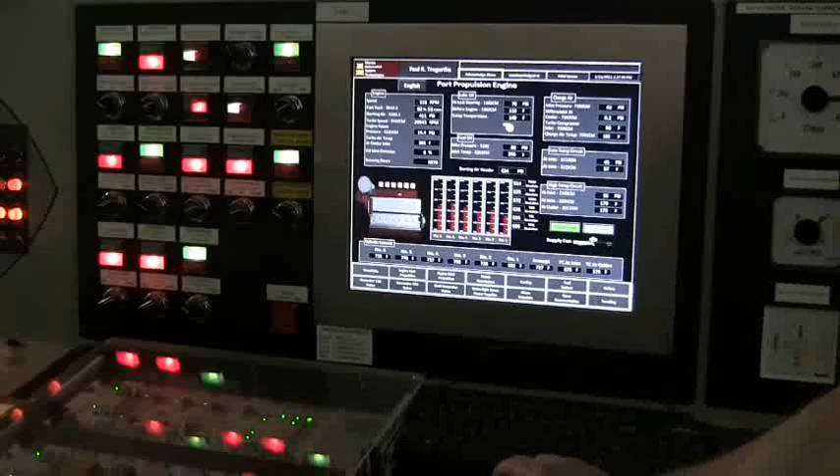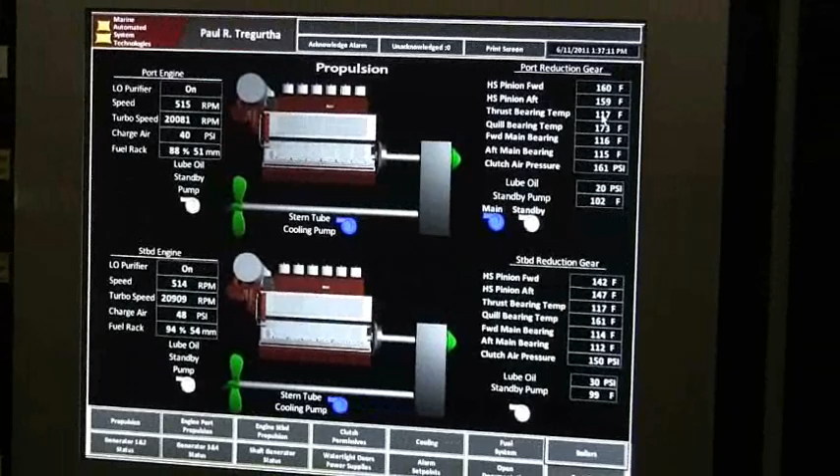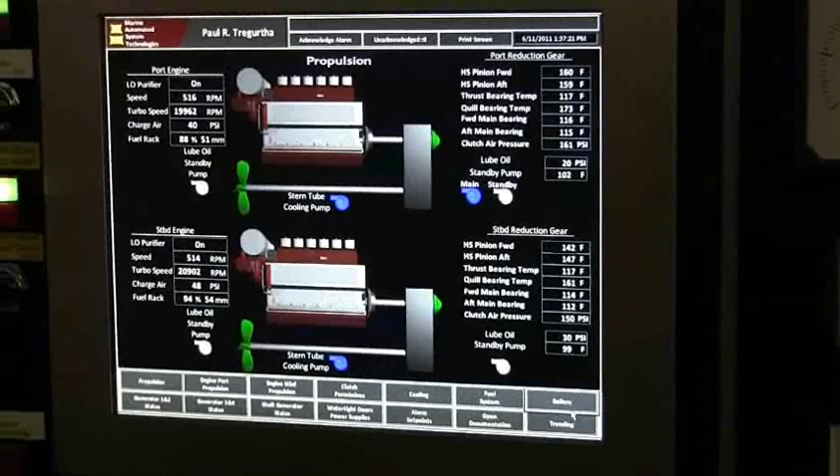This is the combined propulsion display. Each screen gives you a little bit more information. Oh, these are like a V-drive. They're not a direct shaft going out the back from the bell housing and the motor. They go into a gearbox, I'll show you that when we go down there. So essentially it's kind of a V-drive, kind of, right? It's not a V, but it's in backwards.

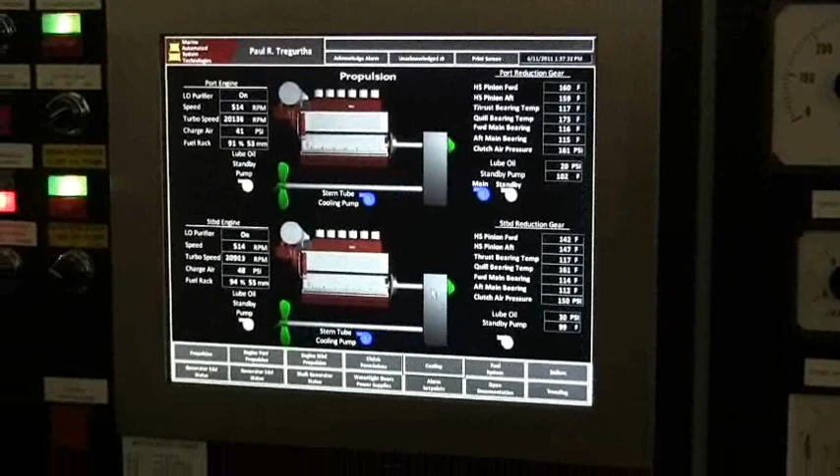Is it a reduction gear in that transmission? That gray box to the right is actually the reduction gear. At what ratio? That's about 4.3 to 1. We're turning 514 on the engine and 119 on the shaft.

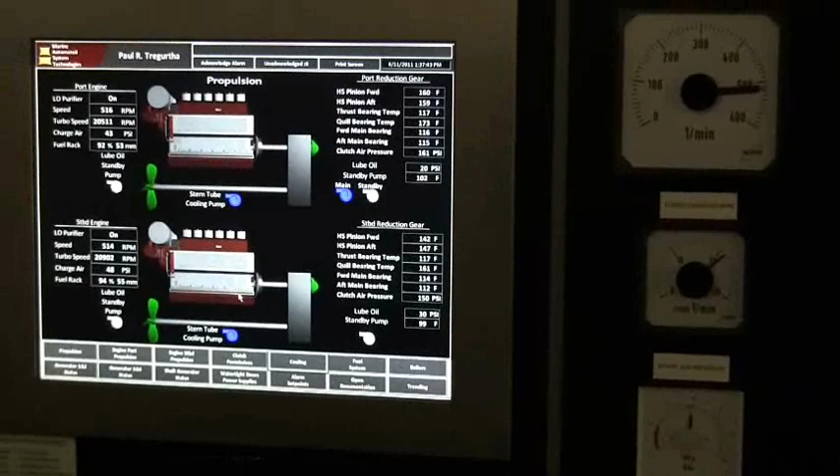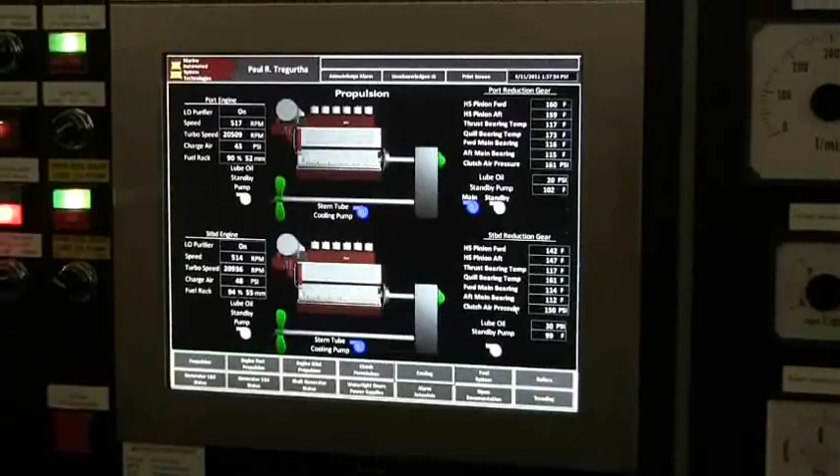This is the reduction gear, your clutch housing hangs on there also, the air clutch. You see all your varying temperatures on your reduction gear. You've got your little purifier and stuff. The turbo is going 20,000, 21,000 RPM right now.

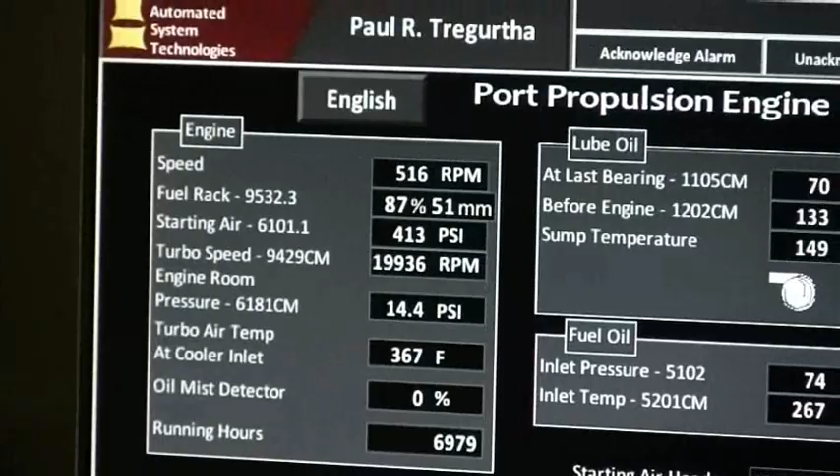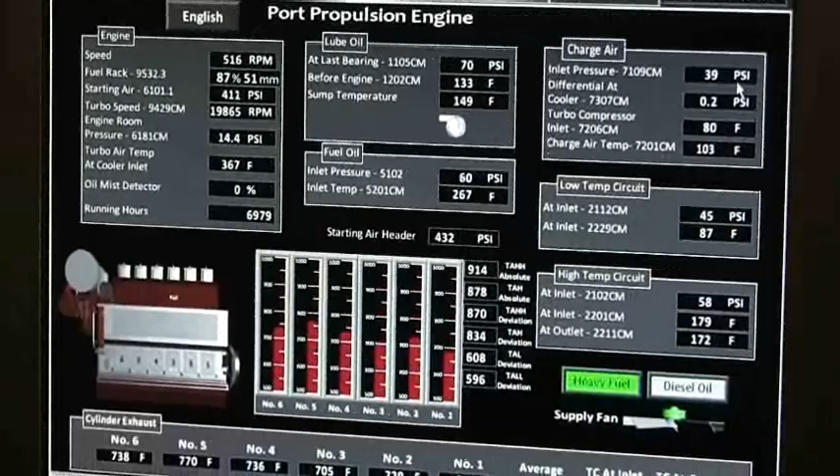Let's get back up to that one. We're only down to 39 pounds of boost, but if you're going flat out, we've seen it up to 52 pounds boost. That's unbelievable. Yeah, that's nuts.

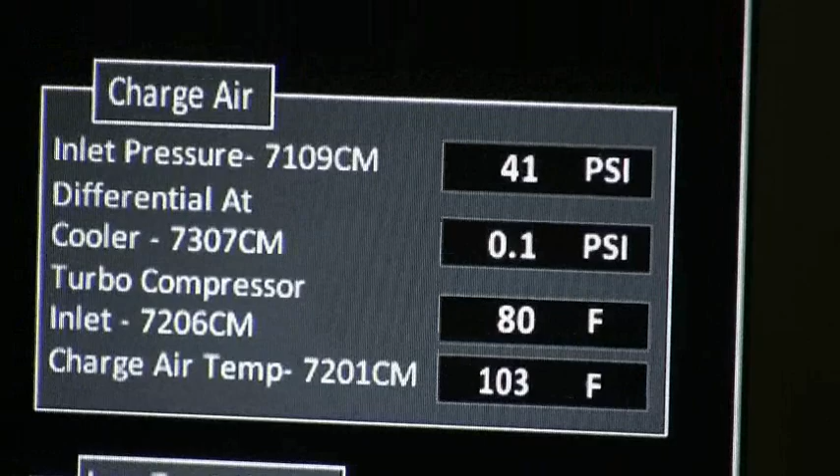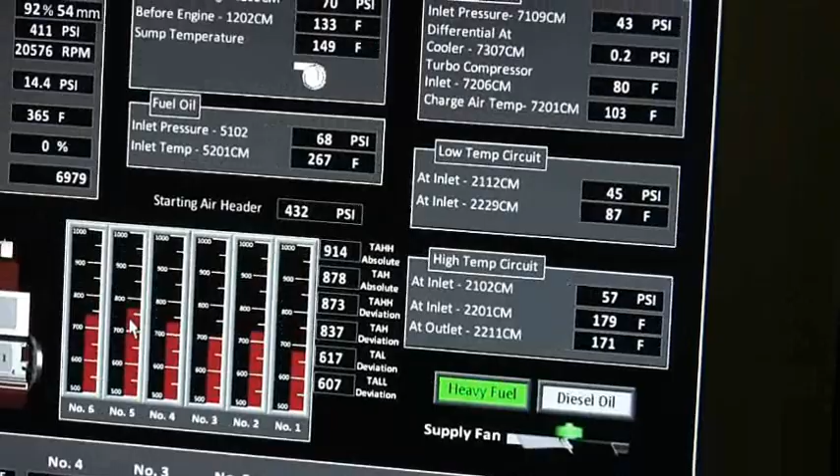Your exhaust temperature — the hottest one is running about 830, 850 right now on number 2 and number 5. Number 5 is at 769.

It's like our clutch permissives. We have to have all green lights in order to start them up and get ready to clutch in. We have to have all our permissives met before you can clutch in.

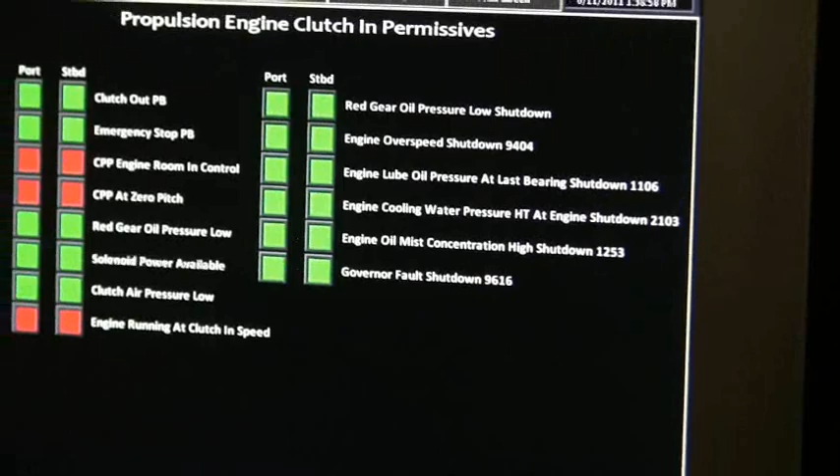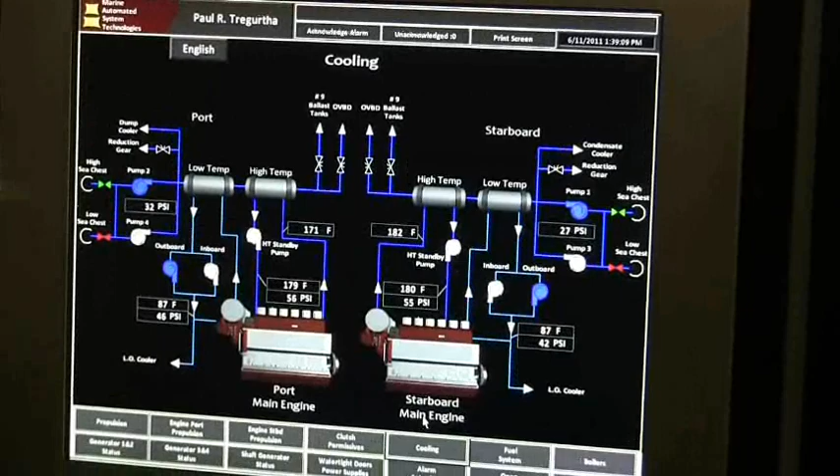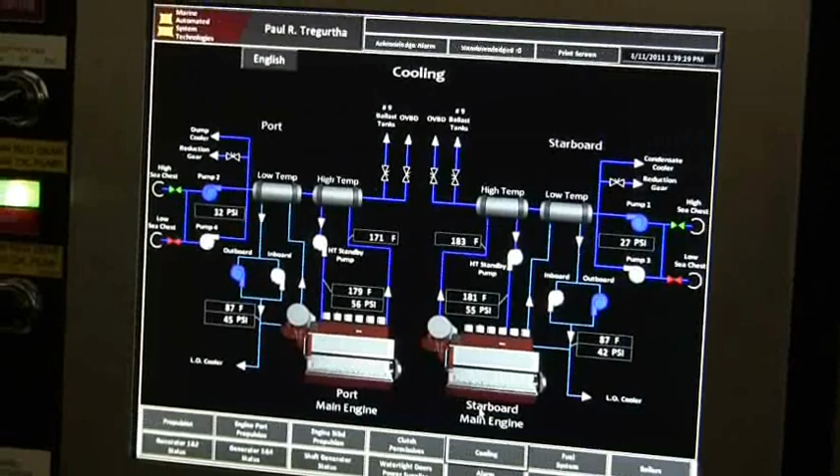Yesterday when we docked in Midwest, did you shut both engines down that whole time? Yeah. I didn't even hear it start. We opened the test cocks on there, Dan will show you them when you go down there. Then you get ready to start up, you pre-lube them, blow them over. You got a pre-oiling system on them? Yeah.

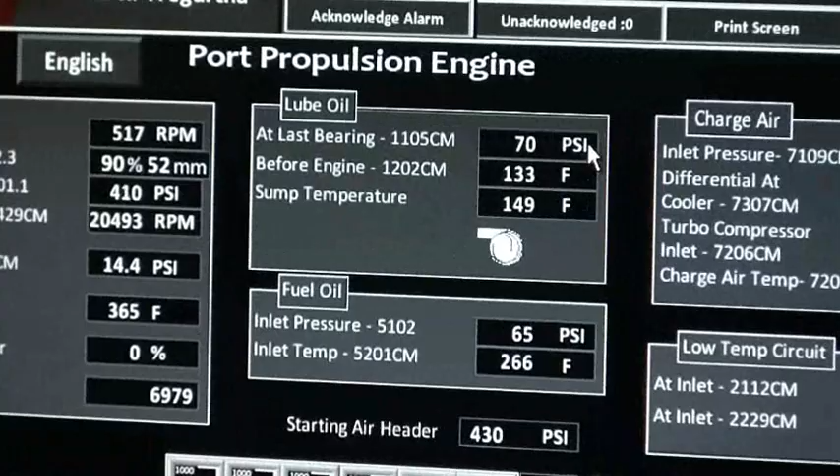That just circulates through the whole internal gallery system of the engine before you start it, so it's not dry. Here you can see what your lube oil pressure is at your last bearing, and some temperature. Well, that tells everything. My lord, yeah.

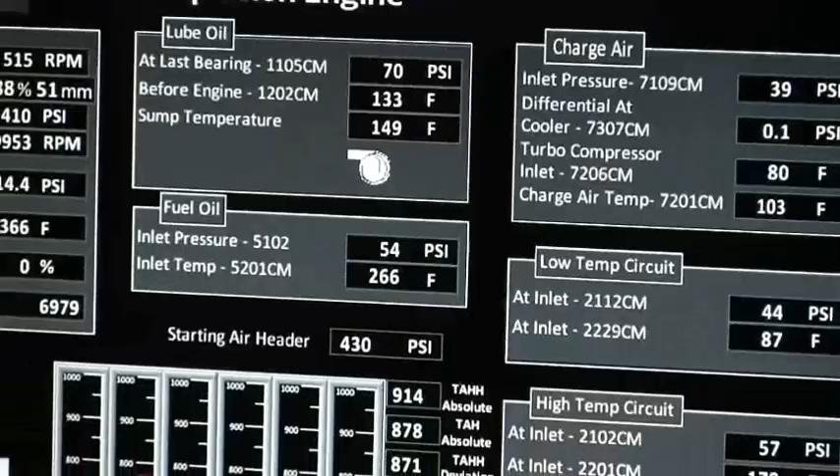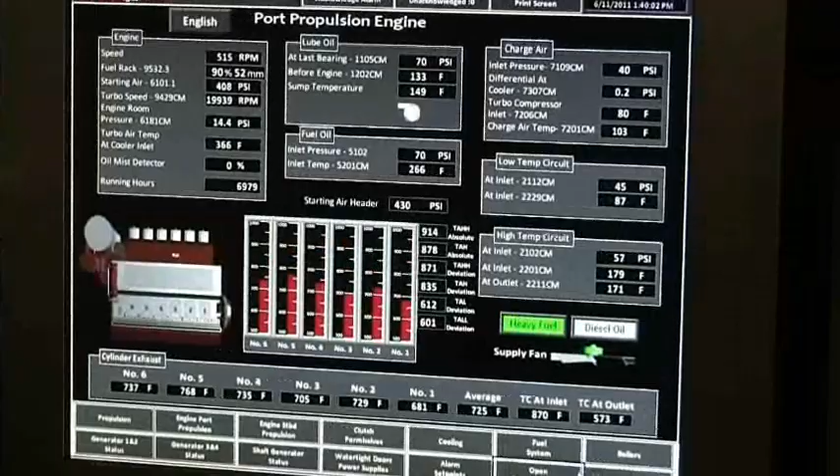Like on your cooling, you've got all your... What about the pyrometer? What about exhaust temperature, the gas temperature? Well, that's right on your port. Would be up over 1,000 degrees? Right here. And here's your turbo inlet, turbo outlet.

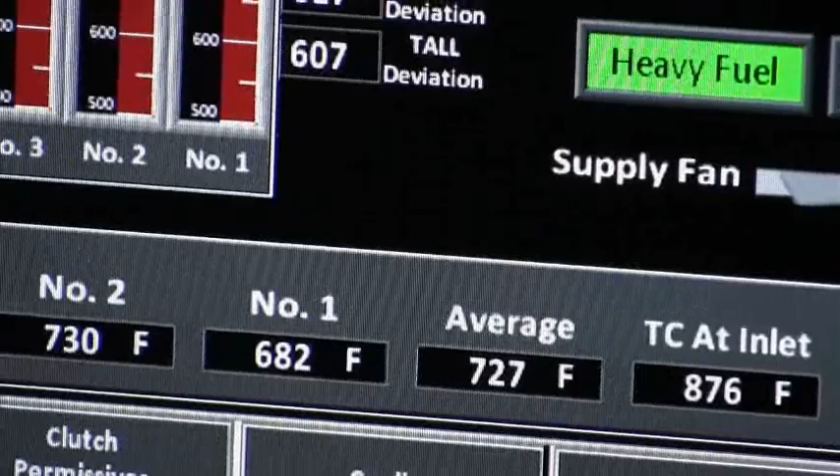Does it show temperature at the stack, or no? Yeah, that would be at your inlet here. 872. Yeah, that's your each individual cylinder exhaust temperature. Wow.

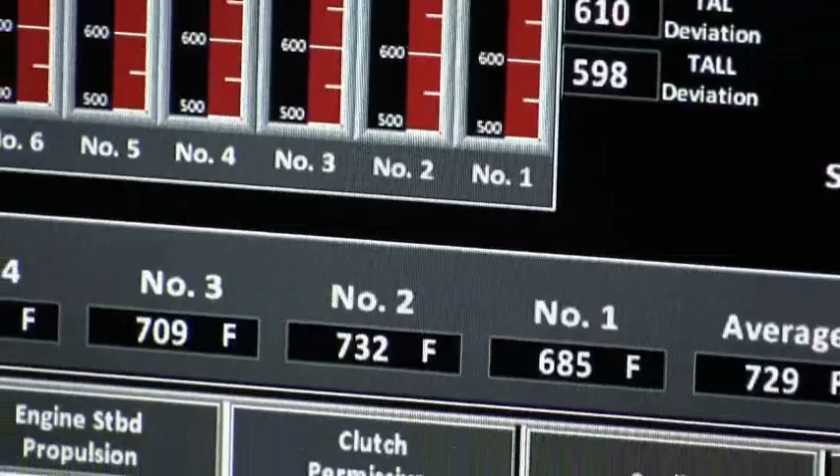Why would one run so much cooler? Say for instance, number 5 versus number 1, almost 100 degrees difference. When they set these in the factory, everything's factory set. Everything is. We have our original

documentation, our test bed documentation, which was ABS approved, EPA approved, and everything else. You can't really take, like on the old engines, one fuel pump and throw it on another one or whatever. You've got a shim plate to get a certain firing pressure and exhaust temperature parameter that you have to stay within. So that's all set at the factory, you can't go swapping out. No, the shims are riveted to the block, we can't change the shims.

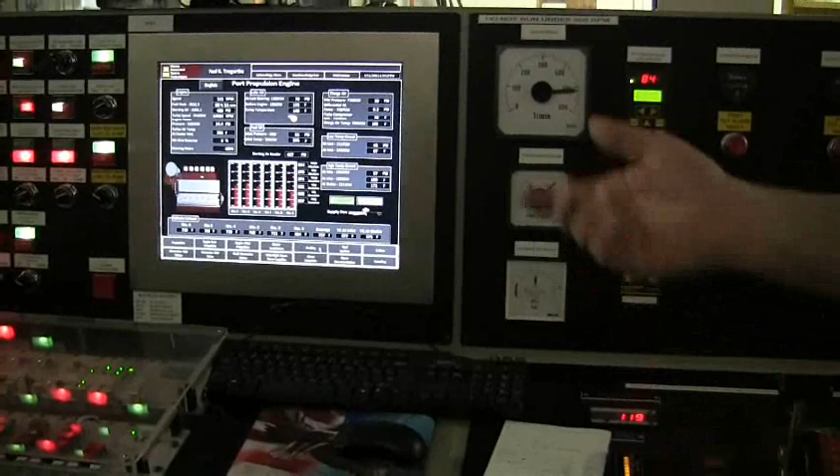See, on the old engines, if we had a problem with a pump or a pump gun, we swapped the whole pump out, no big deal. Here, everything is different. Everything is so EPA stringent. It's nuts, it really is.

Sounds like it. Okay, when we water wash our turbos and stuff, we have to log it. We have an EPA log in there, we have to write down the engine hours, the time, and everything.

Yeah, it's crazy. Are these engines American built or are they foreign? Germany. Germany, MAK.

Maschinenbau Kiel or something - MAK. Really? They've been around for a long time. I've heard of MTUs and MANs, and Deutz and Sulzers, but I've never heard of MAK in a while.

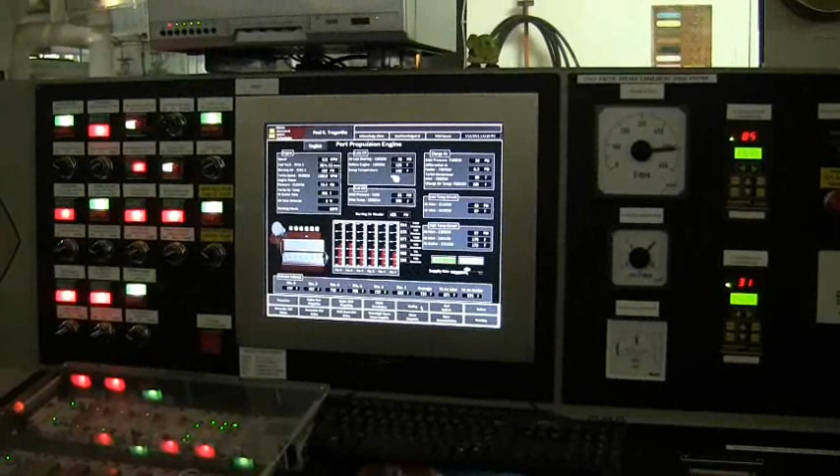MAK is good. In fact, I think they have like 50% of the market now. It's unbelievable. This is a division of Caterpillar - Cat bought out MAK. Cat also bought out EMDs.

Boy, Cat a few years ago wasn't doing too well. Well, you see what their stock has done in the last 3-4 years? Since 2008, it's tripled about. They went out of the heavy duty trucking business now - you can't get a Caterpillar in a Class C or Class D, Peterbilt, Kenworth, nothing. You got to buy their own engine now. Peterbilt and Kenworth make their own engine.

Now you got a urea tank on these new trucks with the Cummins. You got to put urea fluid in a tank, and it burns it, completes the burn before it gets to the exhaust or goes out the stack. Adds $10,000 to the price of the truck.

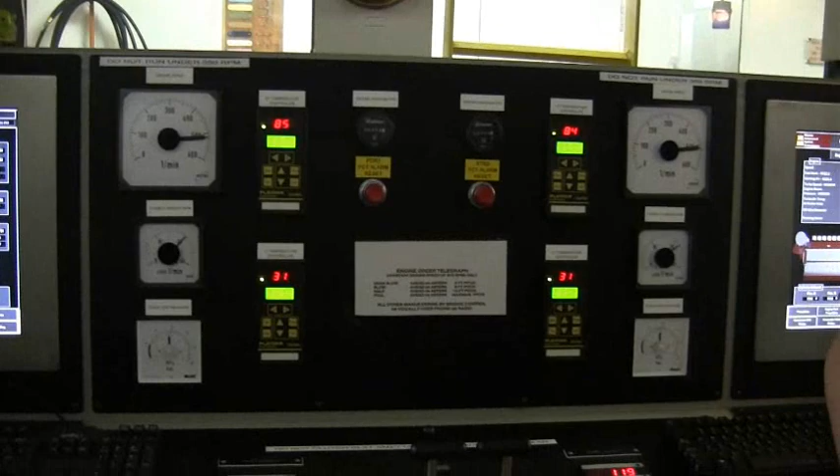Really? So how many hours can you put on an engine before it needs to be overhauled? Well, for any big work we're going to have to do, at 15,000 hours we'll be pulling pistons and checking everything out. 30,000 hours for the main bearings and stuff. So they're pretty beefy main bearings. But we'll be spot checking them at 15,000 hours - pull one head off at the end of the year, check that, and borescope all the other cylinders.

And what kind of fuel burn rate do they consume under power like this? How do you measure it - gallons an hour? Well, we go by pretty much every 24 hours, because everything is so up and down. Figure about 10,000 gallons of main engine fuel a day.

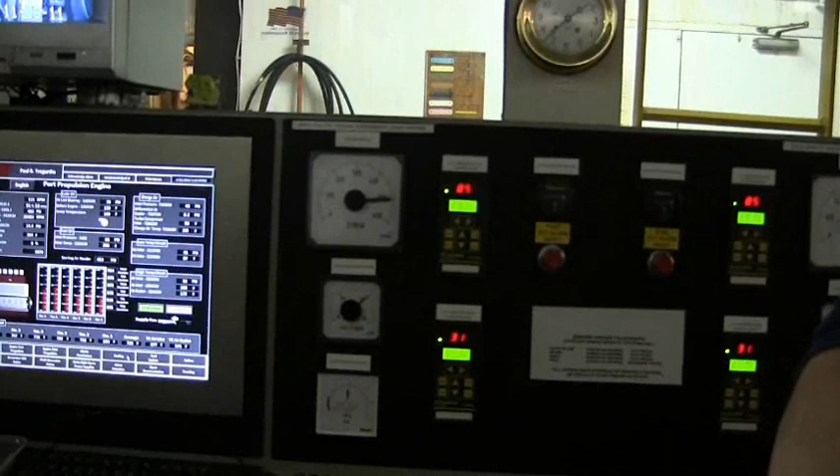But we're also burning that in our boilers when we're docked - we're burning heavy. On the run, our waste heat boilers are creating enough steam that our hotel boilers don't even kick on. That's taking care of the steam load for all our heaters - fuel heaters, purifier heaters, lube oil heaters - and whatever hotel steam or town steam we may need for heat.

But at the dock, you're running the boilers, and that's consuming some fuel too - close to 10,000 a day. In fact, we burn more sometimes. If you're in rough weather and bucking a headwind, you're burning a lot more fuel.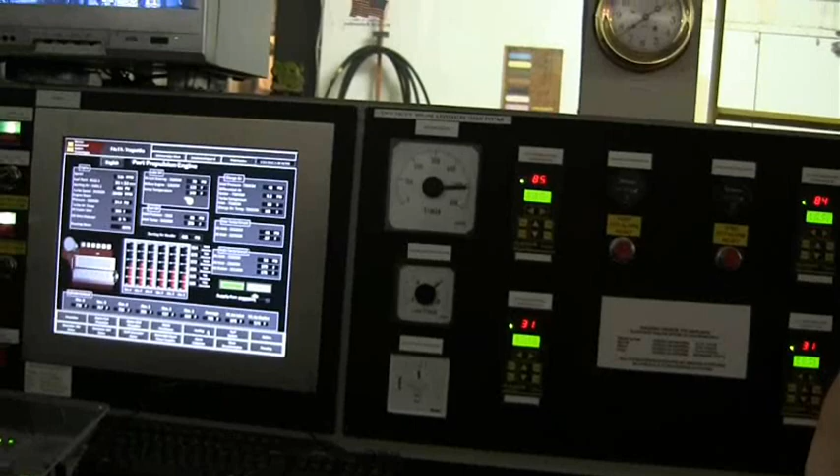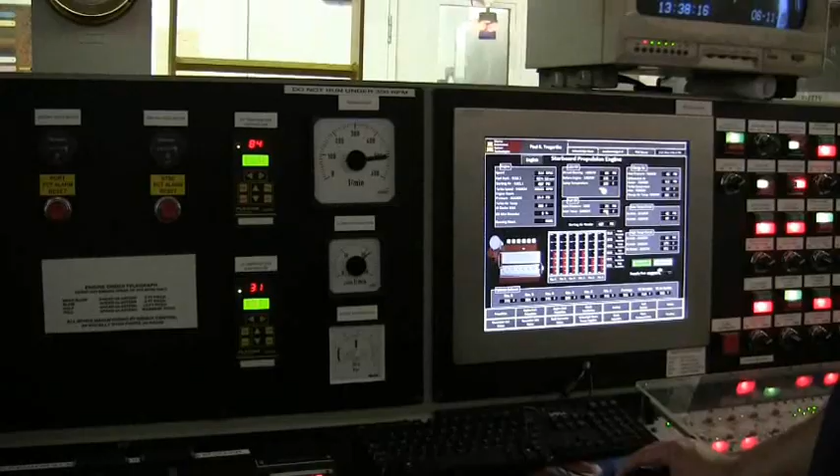You burn that fuel - do you preheat it in a tank, or in a small quantity just before it goes into the motor? Dan will bring you through the fuel module. What did you say, 280 degrees? Well, it's 266 degrees right now - it's set for whatever viscosity you need.

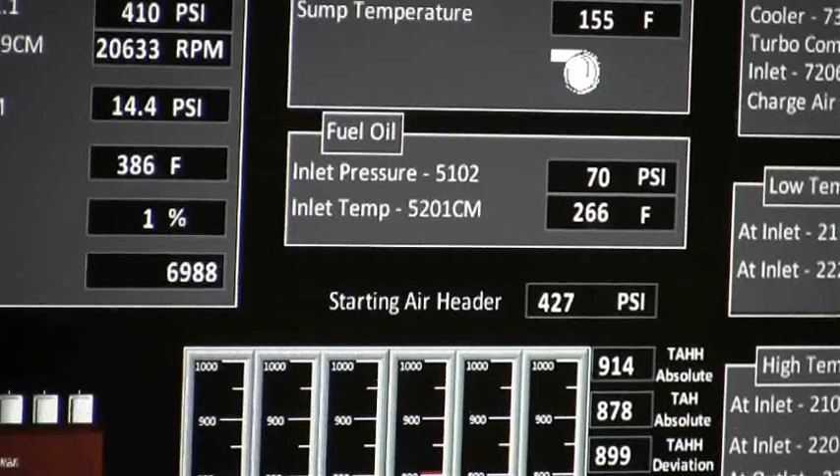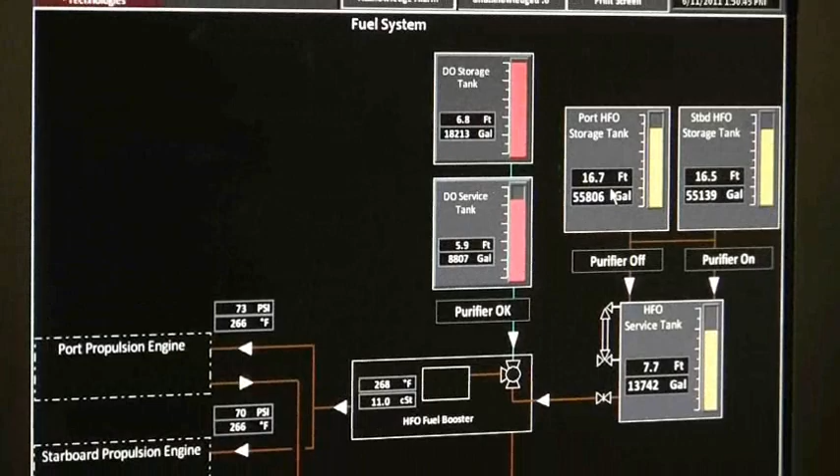So we'll go into the fuel system here. These are the little storage tanks, the service tanks, and these are the bunkers - not sure how many gallons we have in them. It goes into our heavy fuel service tank, then into our heavy fuel booster module, which heats it up. You're not heating up 5,000 gallons at a time to 280 - are you preheating it in a smaller quantity, on demand? Right, it's on demand. Okay, gotcha.